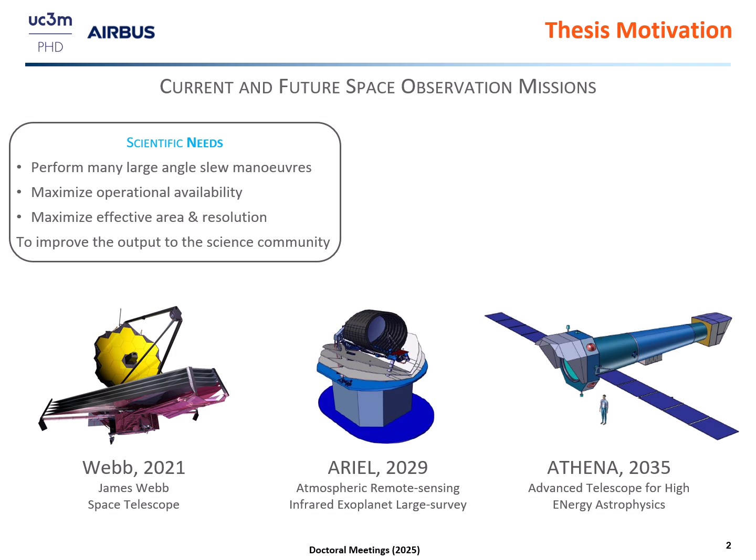Finally, it is essential to maximize the effective area and the resolution of the telescope, for example by having larger mirrors or multiple scientific instruments on board the spacecraft. In order to fulfill all these needs, the space industry relies on new spacecraft design concepts that enable observing the same target successively with different onboard instruments by using a common primary mirror. Examples are the current James Webb Space Telescope and the future ESA Space Telescopes Ariel and Athena.

They use a hexapod to move their primary mirror in all directions and orientations. In addition, these spacecraft have rigid and flexible structural characteristics.

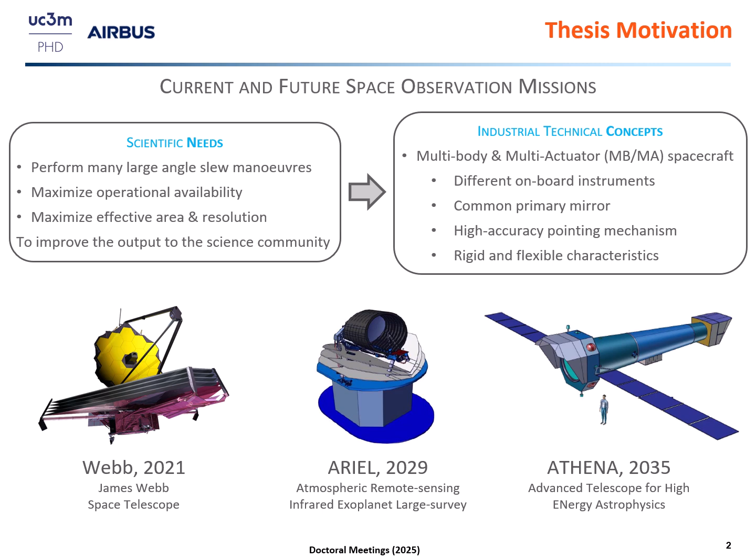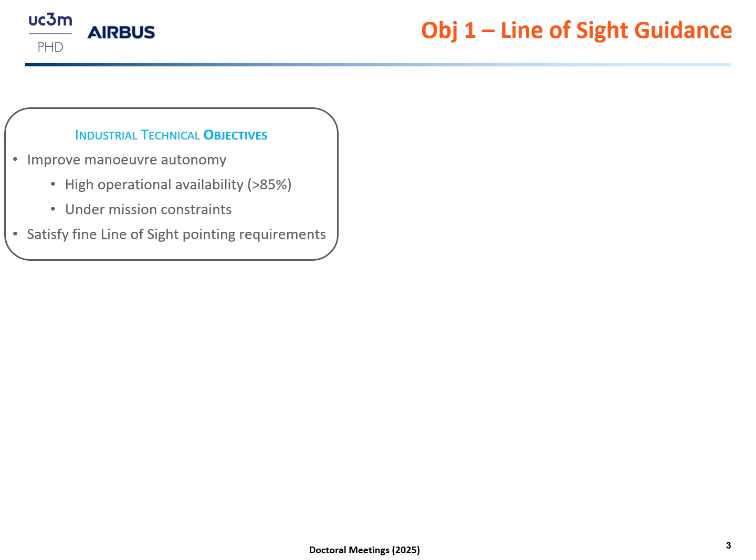So two main industrial technical objectives arise from these concepts: to improve the spacecraft maneuver autonomy and to satisfy fine line of sight pointing. So the first objective of the PhD is the line of sight guidance.

Based on the previously shown observation missions, a general guidance problem has been formulated. It consists in performing autonomous repointing maneuvers from one attitude to another under safety-critical attitude constraints. In order to prevent sunlight from entering the instrument's field of view, the line of sight should avoid the red cones on the picture and stay within a certain angular range about the YB axis.

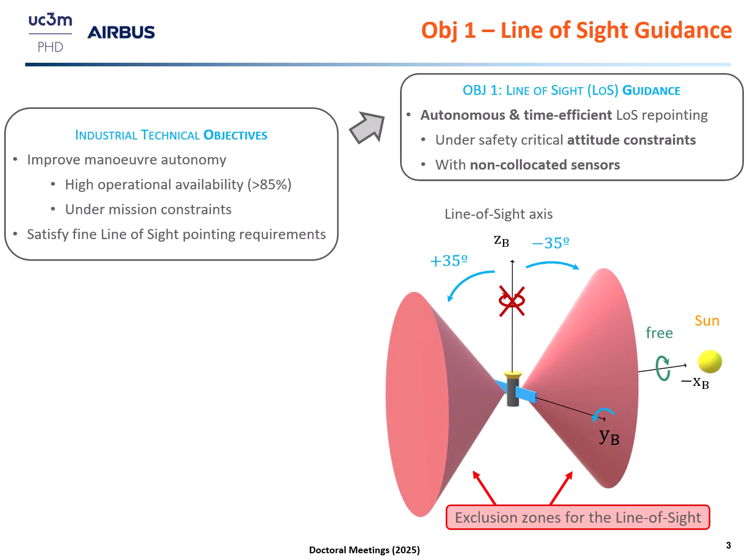The second objective of the PhD is the robust modeling of the spacecraft. Indeed, the mass of the mirror, in blue on the picture, can reach up to 20% of the total spacecraft mass, which induces multi-body and multi-actuator effects on the global inertia and thus on the global spacecraft attitude.

This means that the spacecraft cannot be considered as a single body anymore, and treating it so in the control design would lead to discrepancies when simulating it with real effects. In addition, the mechanisms in green on the picture have flexible modes, and they could interact with the solar array flexible modes, for example. So this represents a challenge to the attitude control system, and this is why we need a control model that accounts for all these effects, including flexible modes and parametric uncertainties.

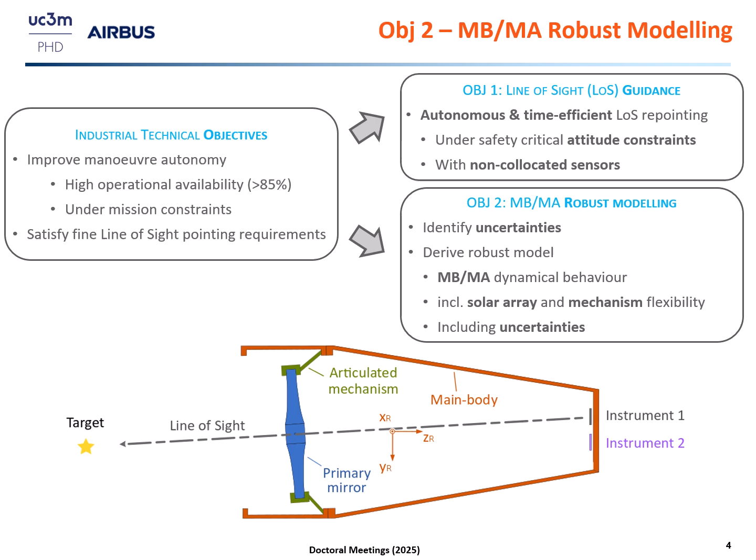So here, the animation just showed that indeed for performing a spacecraft maneuver, we will have to move both the mirror and the spacecraft at the same time.

So for the first objective, a state of practice is to divide the multi-axis maneuver into single-axis maneuvers. A first rotation around the YB axis cancels the initial elevation angle by bringing the spacecraft into the azimuth plane. Then a second rotation is performed within this plane.

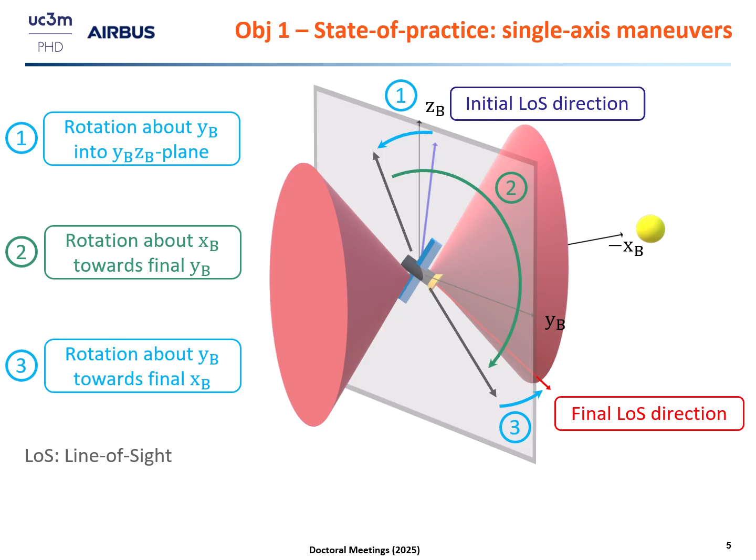Finally, a third rotation around the YB axis leads the spacecraft line of sight to the new elevation angle at the final wanted line of sight direction. This solution satisfies the attitude constraints, but is very time-consuming since 3 consecutive submaneuvers are performed for each slew maneuver.

Since there is no rotation allowed around the ZB axis, the problem can actually be simplified, and I will now show you how we derived a novel solution for this guidance problem.

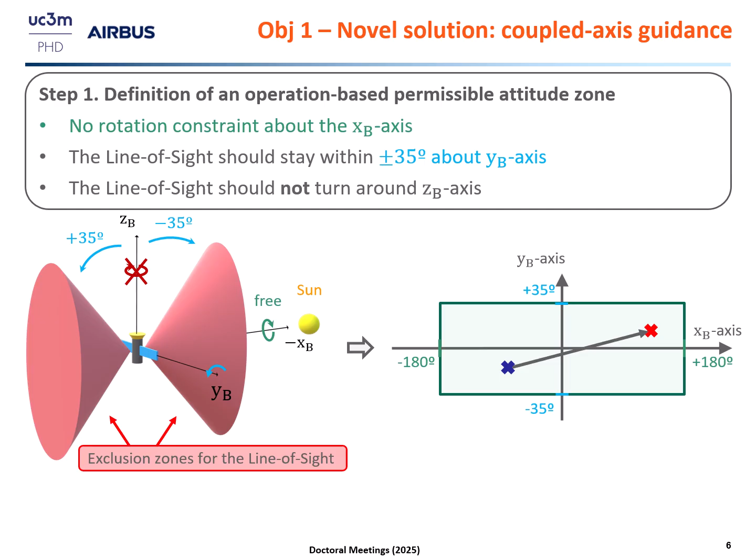So actually, the permissible zone, which is the complementary of this red zone, can be defined in terms of Euler angles, only using the xb and yb axis. This zone is convex, which ensures that there exists a solution when starting and finishing maneuvers from angles within this zone.

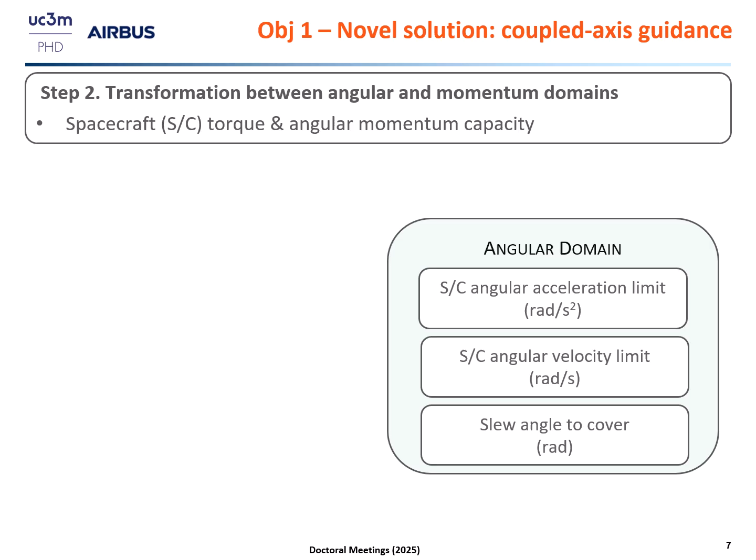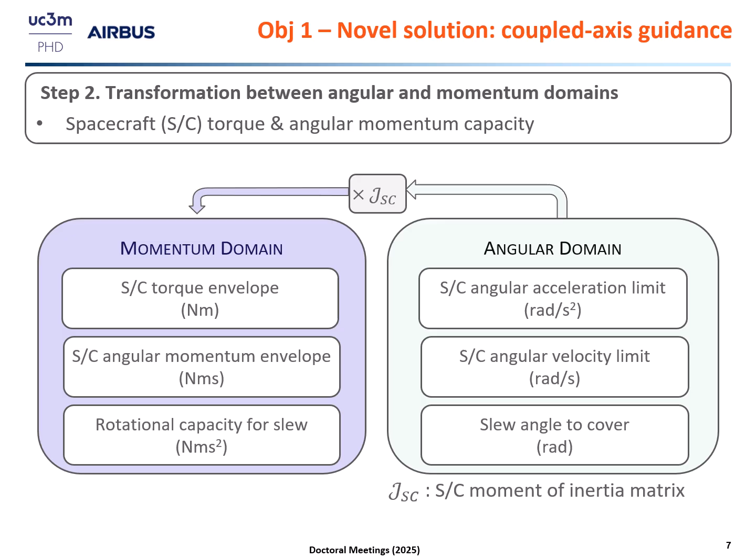Once we have this angular domain, we can find the optimal solution. We can transform this angular domain into the momentum domain by using the spacecraft moment of inertia. This enables us to find the optimal guidance solution using the real angular momentum and torque capacity of the spacecraft. To do so, the ratio from each envelope was introduced.

Depending on the needed rotational capacity, momentum and torque capacity for the slew maneuver, this ratio varies. One ratio is always the same because it depends only on the reaction wheel configuration and characteristics of the spacecraft. However, the ratio from the rotational capacity to the angular momentum, and from this to the torque, vary because they depend on the rotation angle to cover.

From this ratio, we can compute the minimum actuation time for the maneuver, and final checks on the available momentum enable us to compute the final maneuver time for each maneuver.

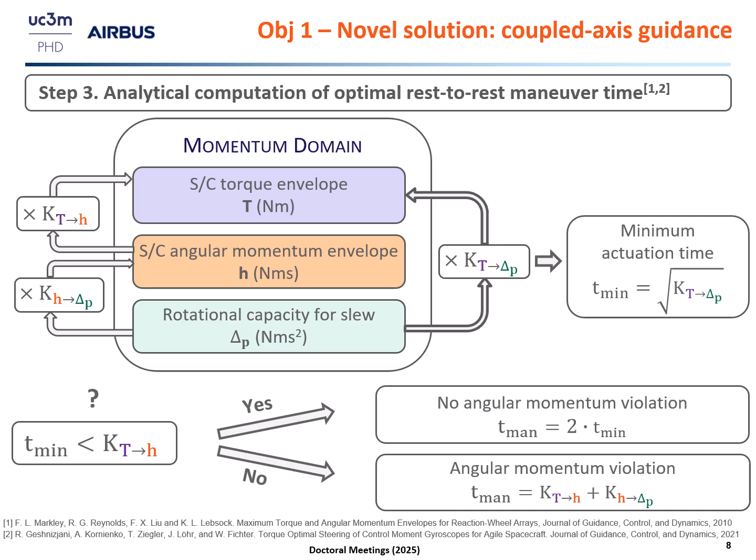This solution was implemented and verified in a mission simulator and enabled an increase in the availability of the spacecraft, representing a reduction of more than 20% of the operational time. The results were presented at a conference and published in the Acta Astronautica journal in 2023.

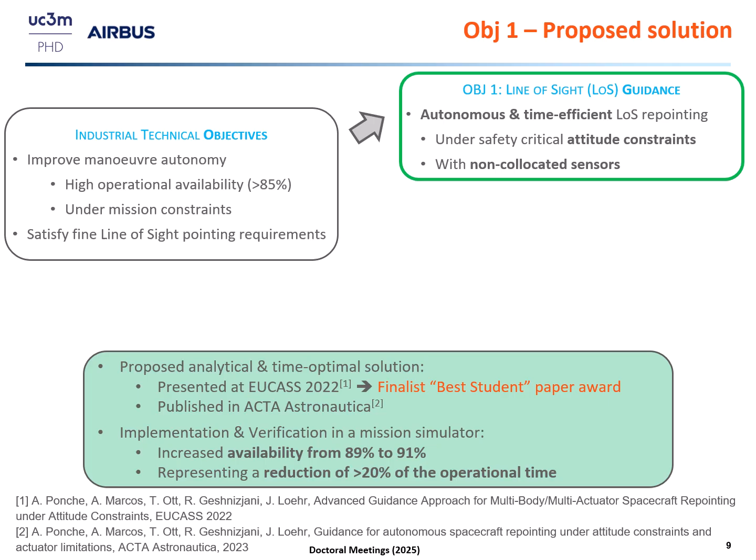So let's now focus on the second objective. For this objective, the main focus was on the hexapod.

The low stiffness of the hexapod actuators induces a flexibility between the rigid body and the mirror, called platform here. At the multi-body level, these flexible modes can interact with those from the solar arrays, or the actuator's motors can excite these interacting flexible modes.

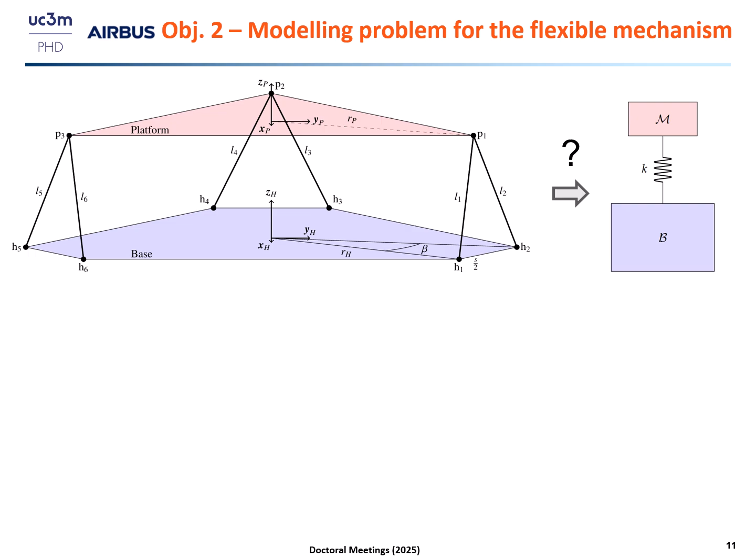Usually in control, we're interested in linear models that relate forces and torques to linear and angular displacements. For common flexible appendages like solar arrays or antennas, explicit state space models are usually derived directly from the modal parameters. But here, hexapod mechanisms contain closed-loop kinematic chains between their base and their moving platform.

This adds algebraic constraints to the system of equations. These mechanisms are ruled by differential algebraic equations, making them highly nonlinear. So the development of a linear model is not straightforward.

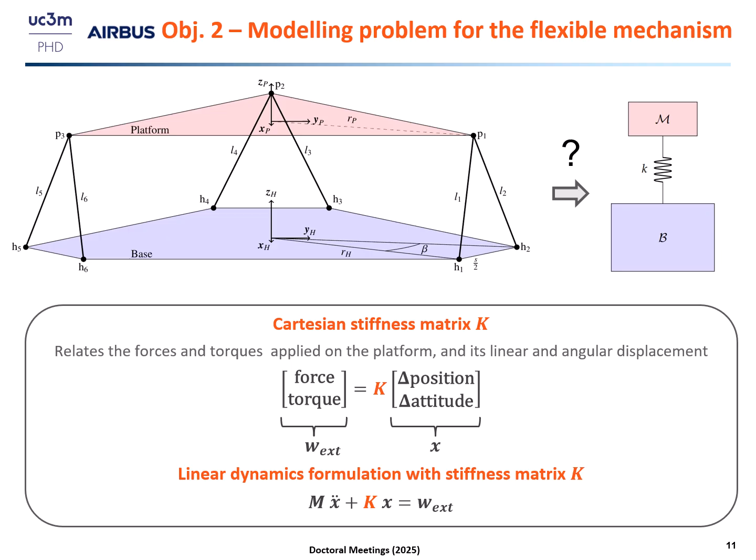This is why an analytical characterization is needed here, and this is the first time this was done for a space control application. So to obtain this K matrix, the starting point is the result of a modal analysis of one hexapod leg performed by the structure department at Airbus.

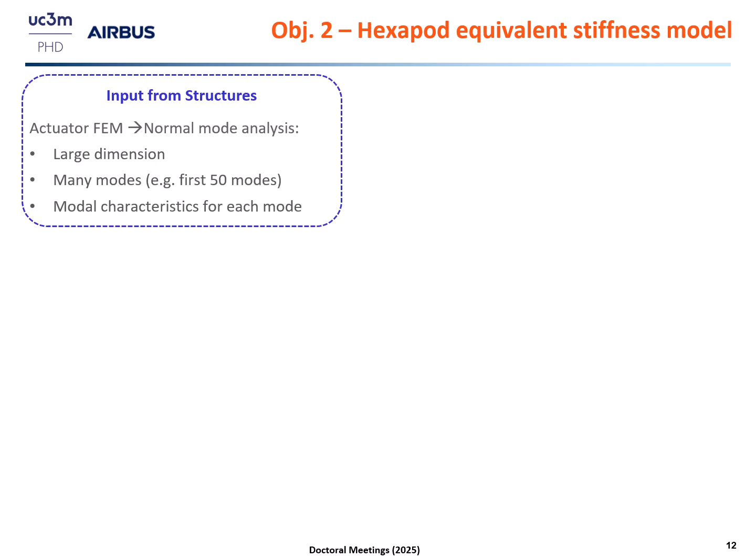From this modal analysis, the most relevant mode, the axial mode, is kept. Since it is expressed in the local leg frame of the hexapod, it is then expressed in the global platform frame and at the center of the platform. This is done for each leg.

The same process is repeated, and once done, all leg stiffness matrices Ki are 6x6 matrices that can be summed, and the sum is the wanted global stiffness, which is again a 6x6 matrix.

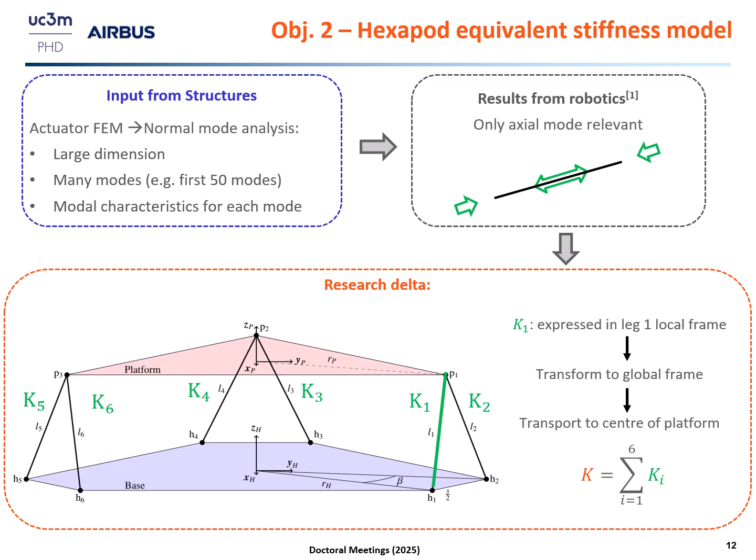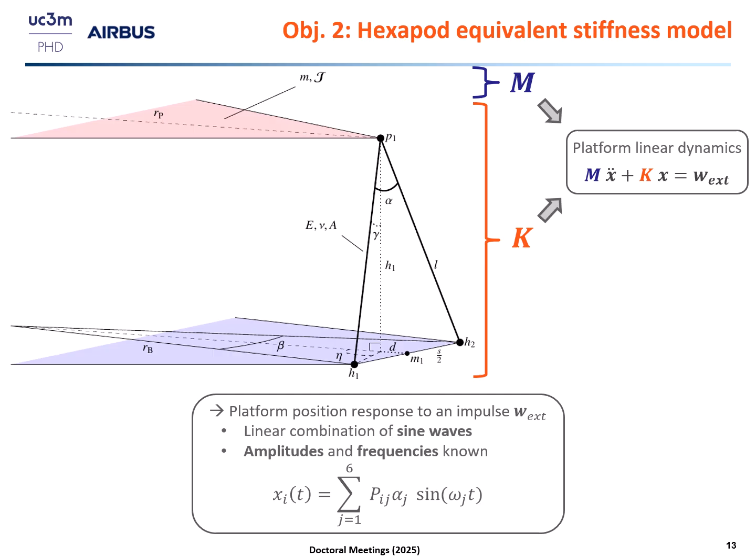The main aspect here is that everything is parameterized, and we can resolve and have an analytical solution to the problem. This is a linear combination of sine waves with known amplitude and frequencies.

Once we have the solution, we could verify it to check the model consistency and validate it to check the model physicality.

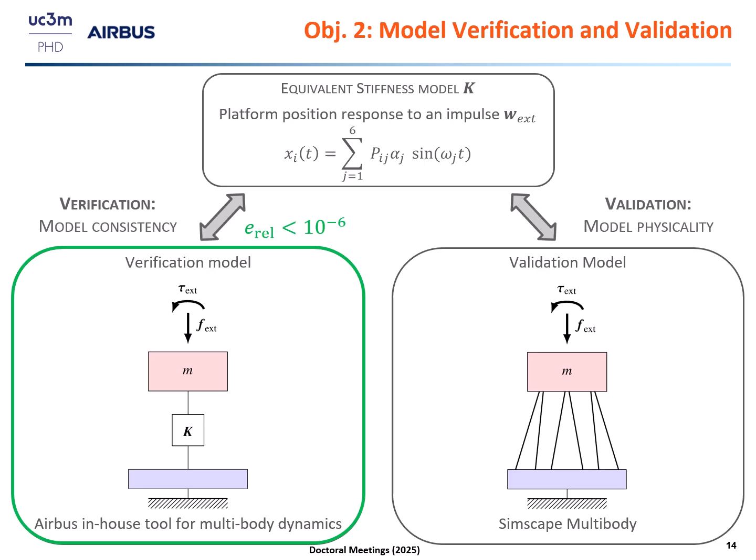Now that a linear model for the flexible hexapod mechanism was derived, the parametric uncertain multibody and multi-actuator model that was derived with the rigid hexapod mechanism can be extended to the flexible ones. You can find more details of this verification and validation in the publication, since this was published at a conference.

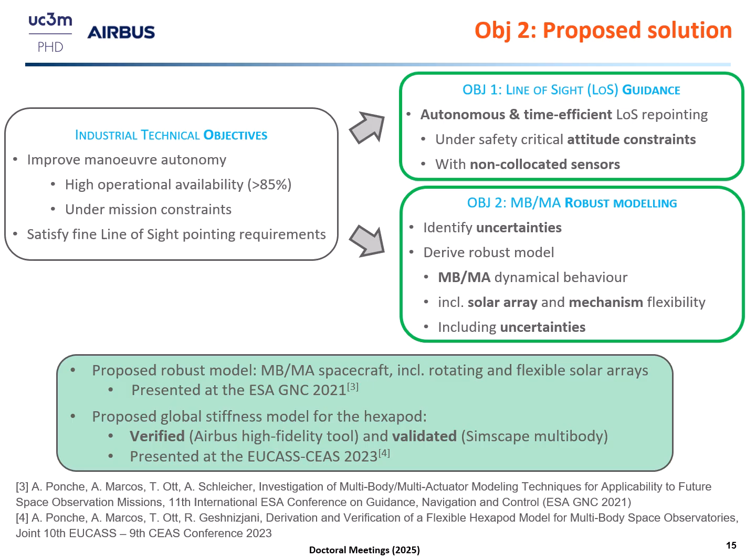I also added here all the disseminations and presentations that were done during the PhD.